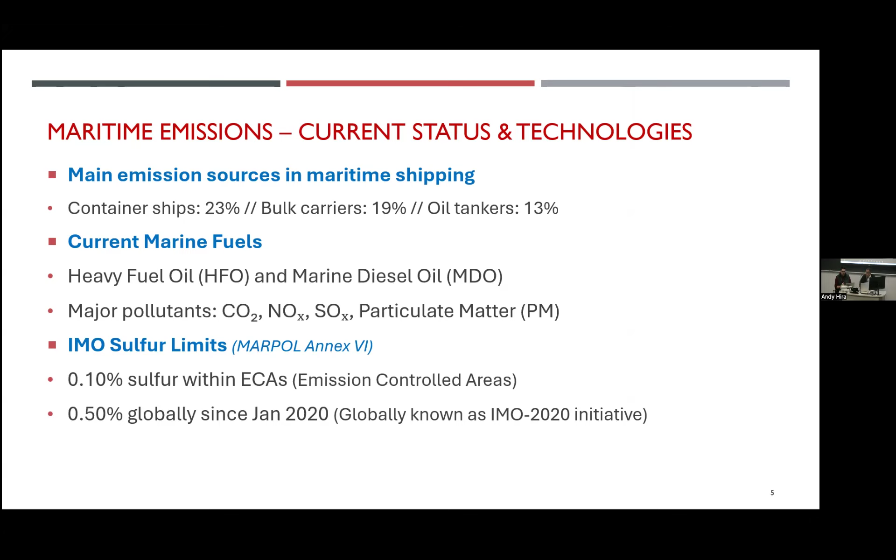IMO has already implemented regulatory standards under the 6th Annex of MARPOL mandating strict sulfur content limits, including no more than 1,000 ppm or 0.1% sulfur in ECA's emission controlled areas, and a global limit of 0.5% or 5,000 ppm of sulfur since January 2020. This is globally known as the IMO 2020 initiative. While these measures have reduced sulfur oxides and particulate matter emissions in specific areas, global enforcement and adherence vary significantly.

Slide number 6. To start with the most viable alternatives, we will focus first on LNG and LPG. Liquefied natural gas, or LNG, is currently considered an effective solution. It reduces CO2 emissions by around 20 to 30% and substantially cuts sulfur and nitrogen oxides emissions.

However, LNG presents a significant environmental challenge because unburned methane escapes into the atmosphere, reducing its overall climate benefits. On average, methane emissions from LNG can reach up to 4% across all engines. Other challenges include high infrastructure costs - LNG terminals cost approximately 1 billion each - and the need for new engine technology. Keep in mind that methane has much more deleterious effects on GHGs and atmospheric warming than carbon dioxide, though it doesn't last as long. All of this concern around LNG is related to its effects on global warming.

On the other hand, LPG, or liquefied petroleum gas, is emerging as a more practical option right now. LPG significantly reduces emissions, achieving approximately an 11% reduction in CO2 emissions and eliminating nearly all sulfur and nitrogen oxides as well as particulate matter. Most importantly, LPG's compatibility with existing infrastructure, specifically vessel engines, and lower retrofit costs make it particularly attractive, especially for smaller vessels. These advantages bring us an easier transition to an alternative fuel compared to LNG.

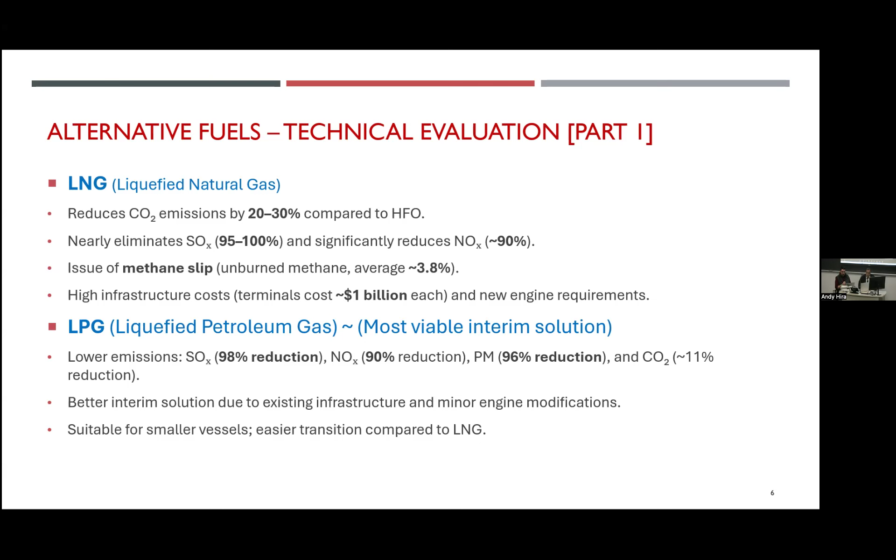Now let's explore hydrogen and ammonia. With developing fuel cell technology, hydrogen is often promoted as the clean energy source of the future. Hydrogen, when consumed, releases no carbon emissions, positioning it as an ideal clean fuel. However, hydrogen's environmental impact depends heavily on its production method. Fossil fuel-derived hydrogen is cheaper but emits CO2, while green hydrogen produced via renewable powered electrolysis is cleaner but more expensive.

We can say hydrogen faces substantial implementation challenges. It requires extremely low temperature storage at around -250 degrees, or high pressure storage tanks, raising significant practical and safety concerns. On top of that, hydrogen embrittlement can weaken vessel structures, creating durability and maintenance concerns. Also, due to limited existing infrastructure, adoption of hydrogen as an alternative fuel requires major new investments.

There is so much money, as we talked about last time, going into hydrogen. The EU, the US, and even Canada have put huge investments into hydrogen. As we discussed last time, hydrogen could make sense if there was an industrial facility near a port where you could use cogeneration to create that hydrogen. But absent that, more than 90% of the hydrogen being produced right now is produced from natural gas. So even though it's being posed as a solution for the green transition, it's in fact not being practiced as one.

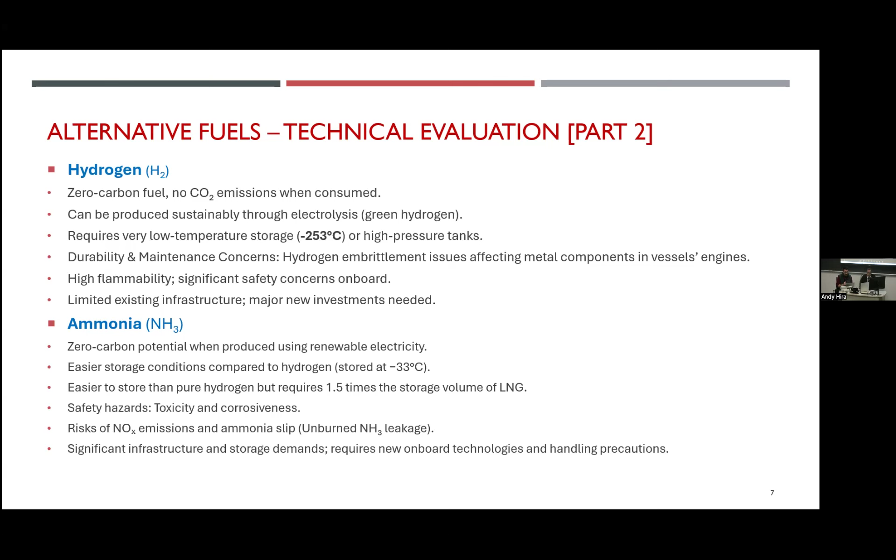So remember, with ammonia, the advantage is that hydrogen is a gas, so you need to cool it to very low temperatures, and then you have to have specialized compartments to compress it.

With ammonia, you can turn hydrogen into a liquid. It's a corrosive liquid, so you still need specialized containers, but it's much easier to develop and handle, and cheaper than hydrogen in that sense. The challenge is that on each end, you've got to convert hydrogen into ammonia and then ammonia back into hydrogen, so that's where additional expenses come in, as well as the corrosive aspects of ammonia itself.

Next fuel to consider is methanol. It presents an attractive low-carbon fuel alternative for shipping, especially if produced sustainably through projects such as the HyMethShip concept, which achieves reductions of up to 97% in CO2 emissions. Yet methanol comes with significant technical hurdles, specifically its lower energy density, about half that of conventional marine fuels, which translates into larger storage needs on board and engine modifications due to methanol's different ignition characteristics.

Meanwhile, biofuels, including biodiesel, offer an immediately implementable and significant emissions reduction of up to 93% less CO2 emissions. However, biofuels' widespread use faces critical barriers, especially sustainability concerns such as competition with food production and the reliability of large volume feedstock supplies, which raises land use concerns and long-term availability issues regarding the required feedstock.

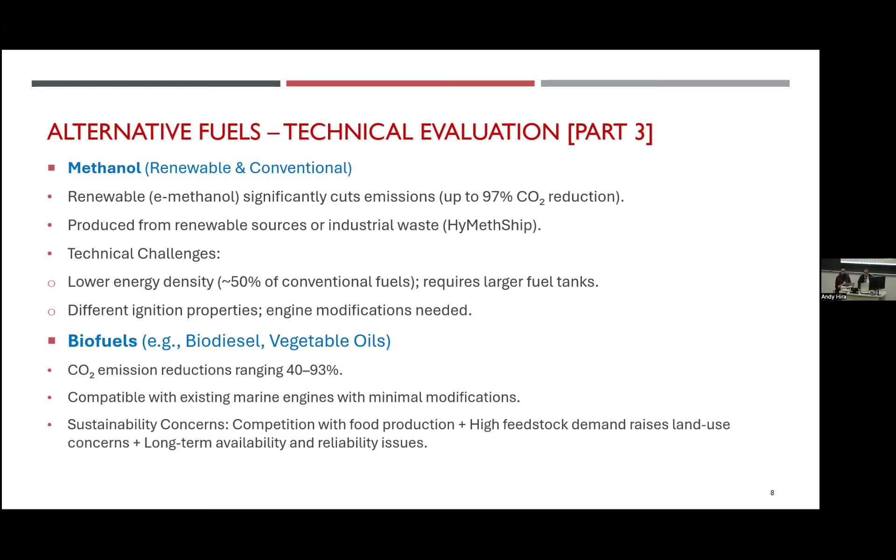You've all probably heard about renewable natural gas. This is something that Fortis is pushing as a big product, and there's a lot of conversation around sustainable aviation fuels that ties into this. The idea is you can use organic matter or organic waste to create this methane.

As Hossein pointed out, there are problems in terms of engine modifications that would be required for methanol. But with biofuels, it can be blended right into the engine as it exists now. The challenge is how much emissions are created in producing that biofuel itself. So like hydrogen, the real question for biofuels is the life cycle of emissions in terms of what feedstock you're creating, and how much it will displace food to create that biofuel.

In North America, we've been providing huge subsidies to corn farmers. If you're back east or in Ontario, you'll probably see blended gasoline with ethanol made from corn. Unfortunately, most analysts would say when you consider all the emissions created in producing that corn and that fuel, it doesn't make a lot of sense. But there are other fuels, depending on how you produce them, like sugarcane, where there's much more net benefit. So it really depends on the production process for the biofuel itself.

Now let's talk about batteries and renewables. Battery-powered propulsion systems are promising for maritime emission reductions on short-range operations and ferries, achieving zero emissions on board. However, batteries' practical application for global shipping faces significant limitations due to their limited range, around 2,500 kilometers maximum, plus high weight, long recharge times, and extensive space required on board for ships.

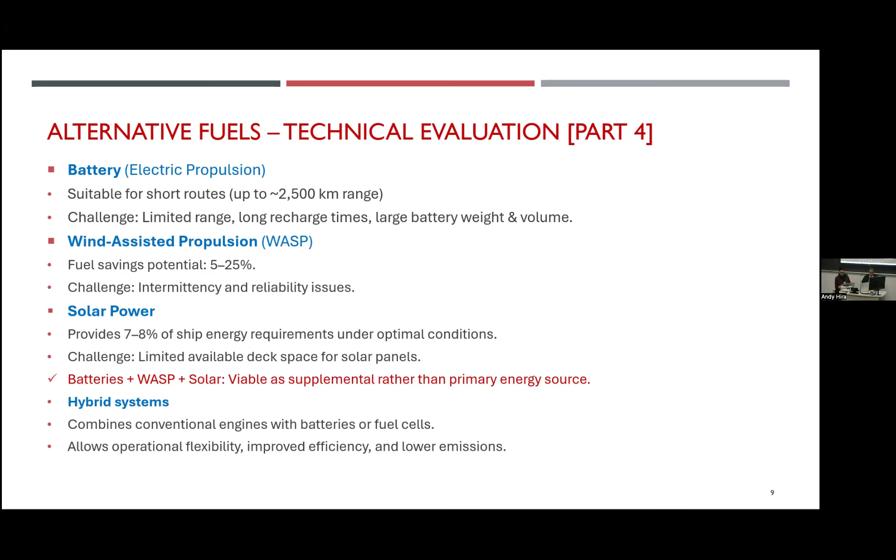Given these constraints, integrating hybrid propulsion systems, combining conventional fuels with batteries or renewable sources, represents a practical and efficient interim solution, particularly for short-range maritime operations.

Now, here we go beyond fuels and talk about engineering aspects and operational measures. Significant emissions reductions can also be achieved through advanced engineering and operational efficiency improvements.

For instance, optimized hull designs can lower fuel consumption by up to 15% by reducing water resistance. Similarly, adopting advanced propeller designs and engine tuning can deliver an additional efficiency improvement of 5 to 10%.

Operational strategies play a critical role as well. For example, slow steaming, which involves deliberately sailing ships at lower speeds, can dramatically reduce fuel consumption. Slowing down by 10 to 20% saves fuel proportionally. Additionally, implementing advanced route optimization systems can cut fuel usage by another 2 to 4%, leveraging real-time data and weather information. Finally, port-side solutions like cold ironing, providing ships with shore-side electrical power at ports, effectively eliminate emissions from ships idling at dockside, significantly reducing localized pollution.

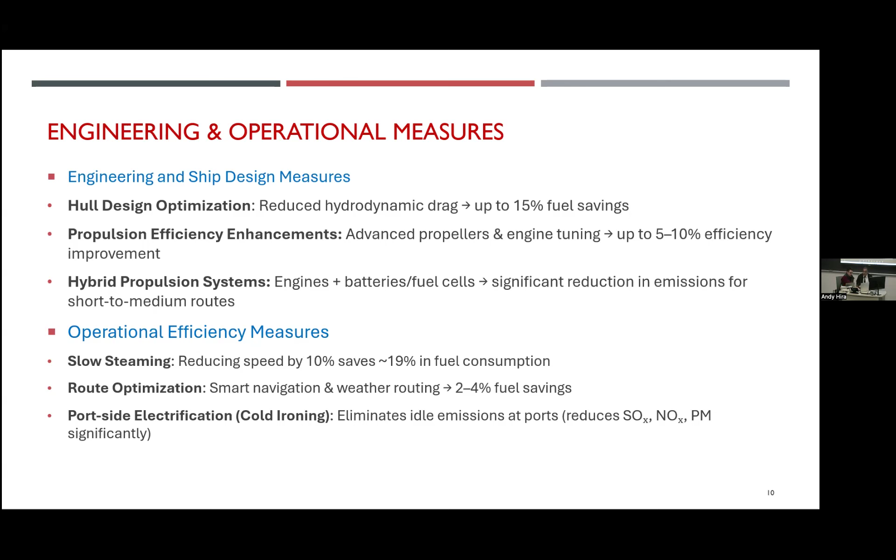It wasn't that long ago that we were in the pandemic and everyone was talking about disruption of supply chains, so this is a huge issue for maritime shipping. That is optimization - in our society, everything is just in time. We want to buy stuff and we want it to be available whenever we want it. But that is not actually the optimal situation for reducing emissions. So there's a bit of tension between taking slower routes and multiplying those routes so you have multiple ports along the way, thereby reducing emissions, versus the demands consumers have. That's another place where policy could play a big role.

Okay, so that takes us to the policy portion, which we've already started to talk about. And as you saw from my last comments, there's a reason why Mr. Trump wants to control the Panama Canal - just the huge amount of revenues that are generated, as well as the strategic importance in terms of distance. It doesn't seem like it's that much distance, but when you multiply that distance by the amount of freight going through that canal on any given day, it's incredible amounts of both emissions and costs involved in both the Suez and Panama Canals.

Obviously the biggest challenge there is there's supposedly some Chinese investment in these ports, but more importantly, I think the question is about the US's desire to control its supply chains. So here again, we have a tension between lowest economic cost. We know, for example, Chinese electric vehicles are much cheaper than Western vehicles, and that's why both the US and now Canada and the EU have put these large tariffs on Chinese electric vehicles. So what we're seeing is really a retreating from the global trading system as we've known it since 1945.

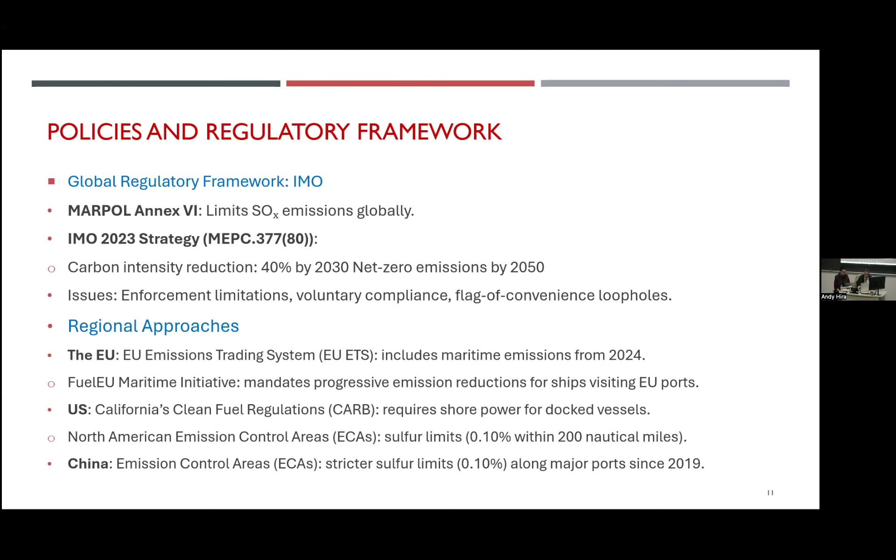This brings up another global question about unequal burdens. There are unequal burdens in terms of carbon emissions that particularly fall on small Pacific island nations and coastal areas like Bangladesh that don't have money for mitigation and adaptation. You'll recall from the Paris Agreement that the West pledged $100 billion in assistance, and obviously with the takedown of USAID, that money is probably never going to come from the West.

So the question is what is the way forward in a way that understands the inequitable burden placed on countries unduly affected by climate change, and on coastal areas, especially in the global south, that will be most affected. So far, despite the IMO's intentions, we don't really have a system for doing that.

The IMO doesn't have a system like the EU for tracking every vessel in its waters. It doesn't have the ability to regulate emissions. Like the UN can talk about peace and emissions control, but they don't have the means to enforce it. So the starting point would be to create a more robust data system for tracking emissions by shipping.

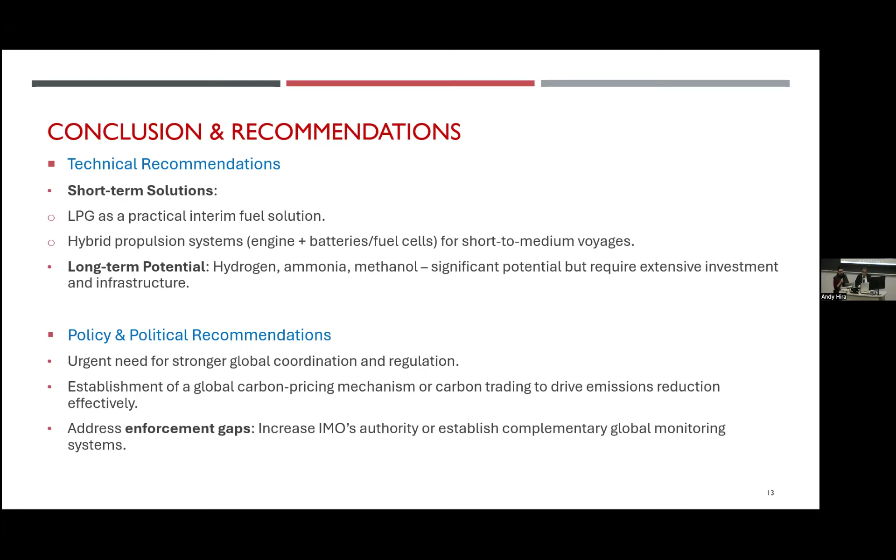Okay, so that's the end of our presentation, and we're happy to take comments or questions. I see that Dr. Wright has a comment. Andy, go ahead.

Hello folks, I apologize I can't be with you in person today. I'm double shifted and I'm in a noisy environment, so I apologize.

But I think there's one pathway that you alluded to but hadn't really dialed into, and that is liquid petroleum gas. Because like the regular vehicle stock, we have a huge standing stock of vessels that they are what they are. But one of the pathways for fuel generation is taking captured atmospheric CO2, combining it with hydrogen through the Fischer-Tropsch process, and you can build any fuel that you like.

And so that could all be shore-based and without any modification of existing infrastructure. I think those kinds of pathways have not been explored enough in the world in general as potential ways forward. So that's my two cents worth for the day. But great presentation, thank you very much.

Thanks, Andy. I'll follow up with you to get more details about your suggestion so we can include it in the paper. Is anyone else? Yeah, Stefan. You have to use this so they can hear you at home.